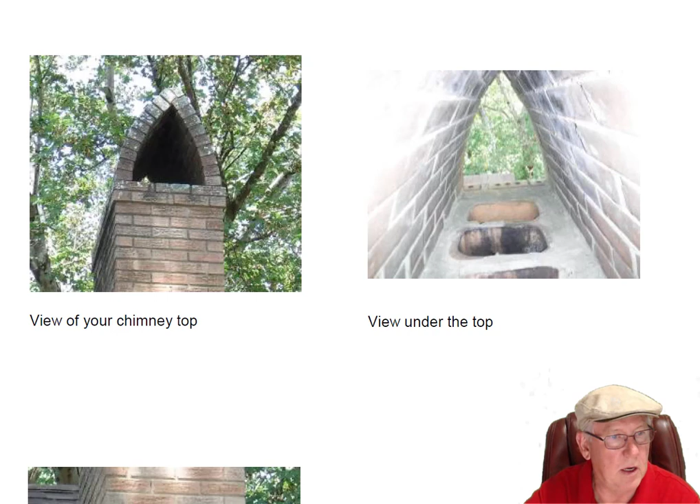Why a mason chooses to use two flues instead of one, it's a mystery to me. I've been doing this for a long time. We would have never done that. We used to build a lot of chimneys in the 80s and early 90s. But anyway, let's see. Flashing looks good. Looking at the flashing here, looks great.

Upstairs fireplace never been used, right? When I came, there was a mountain of trash, leaves and debris behind the damper. We took that out, got rid of all that so we could get an inspection in there. Let's take a look at that flue system. So the upstairs flue, it's straight up. The one downstairs makes the bend around the leg of the fireplace and then goes up like that. So there's more turns to that one.

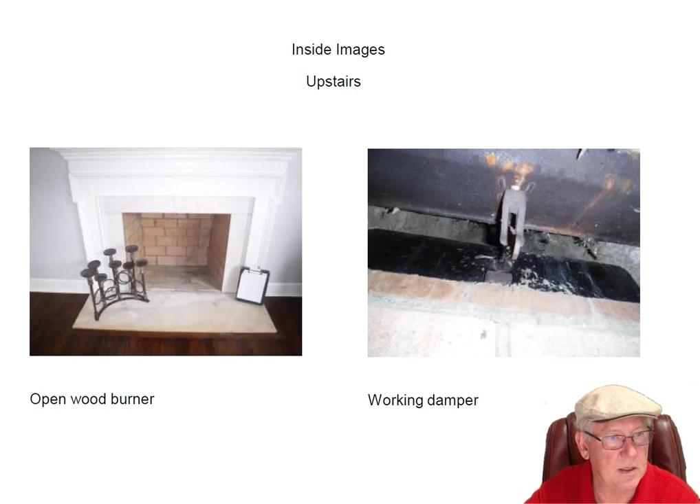But this one, we can see all the way up. As a matter of fact, we ran the camera all the way up. This is actually the bottom side of this chimney cap right here. So we're just looking straight up the flue here. Missing mortar at the flue joints, and this one.

Well, we scan both vertically and horizontally, and that's where you get this shot. And this is done with a different setup. This is called a chim scan. These are horizontal images. Anyway, you could see there was never any cement or mortar between these flue sections. And there's a flue joint like this every 2 feet.

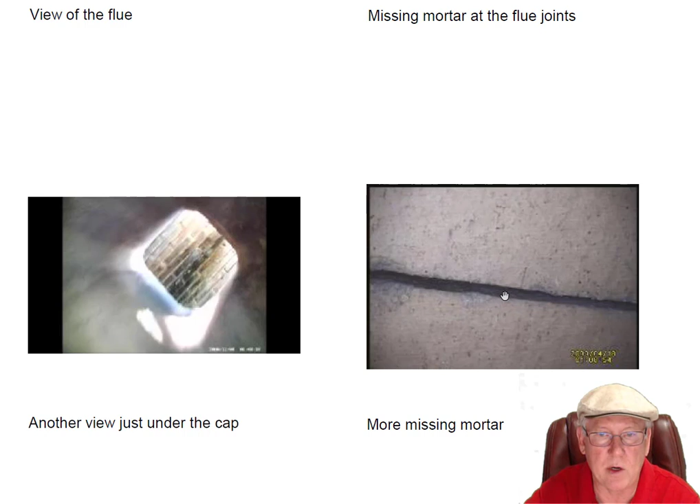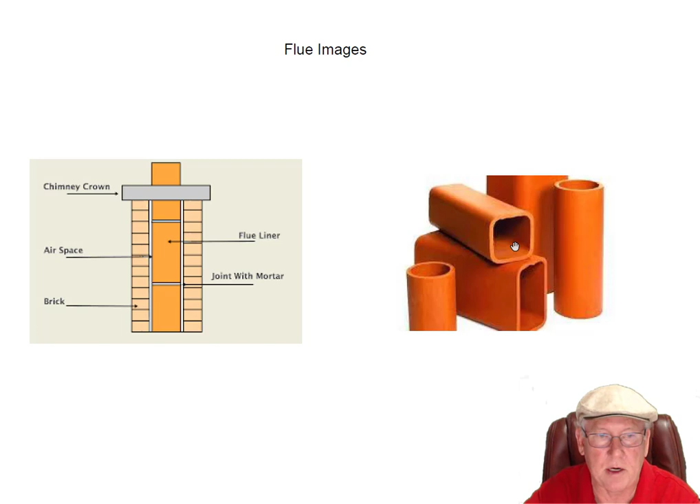Let's see if I put some illustrations in here to kind of help you a little bit. This is basically how a chimney is built. These are in 2-foot lengths, right? And these are the flue joints. And this is what flue pipes look like. Yours is 13 by 13 here. So anyway, that gives you somewhat of an idea how that looks. All right, let's go back.

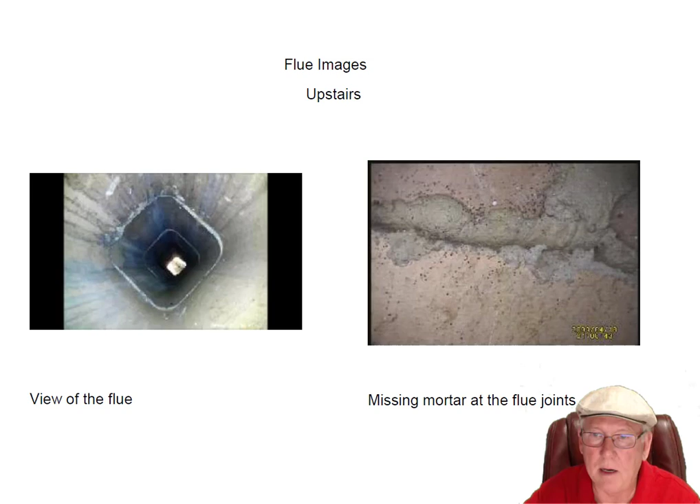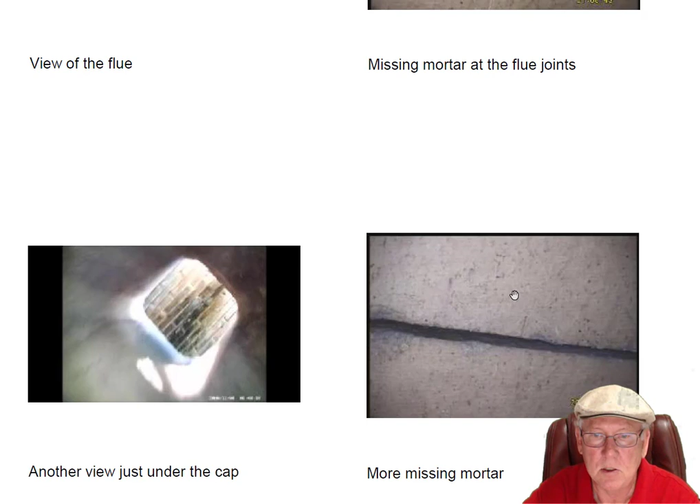Okay, so basically, there's no mortar here, never has been. They've never used the upstairs fireplace. Who knows if there would have ever been a problem. It's shocking to some people that the building inspector doesn't pick up on that, but they don't look at the chimneys very closely. I can tell you that because I look at 5, 6, 7 every day. That's how many inspections I do a day, and I would say that a lot of them are out of spec by quite a bit. The chimneys are too short, they're too this, they're too that.

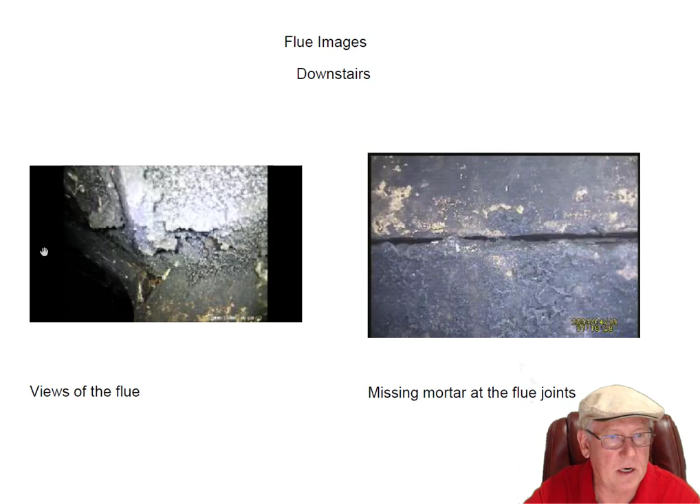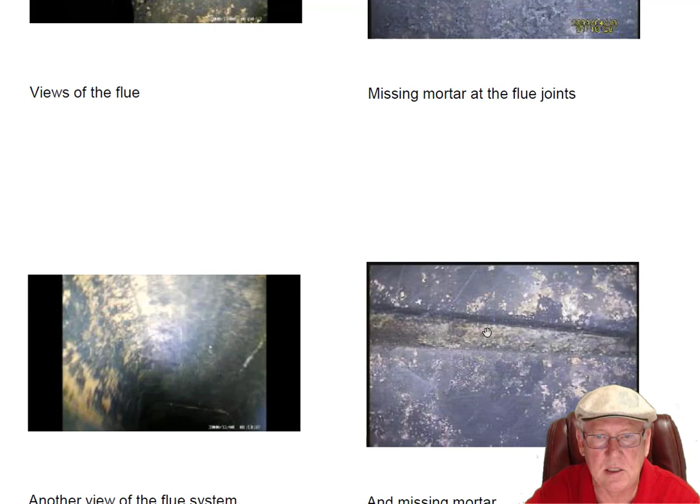Downstairs fireplace flue system, hard to get a good vertical visual of it, but we did the best we could in here. But the horizontal visuals, you could see these pics, they're showing that there's mortar missing in the flue joints. This one, it's hard to tell if there was ever any mortar in there. It looks like there might have been at one time or another.

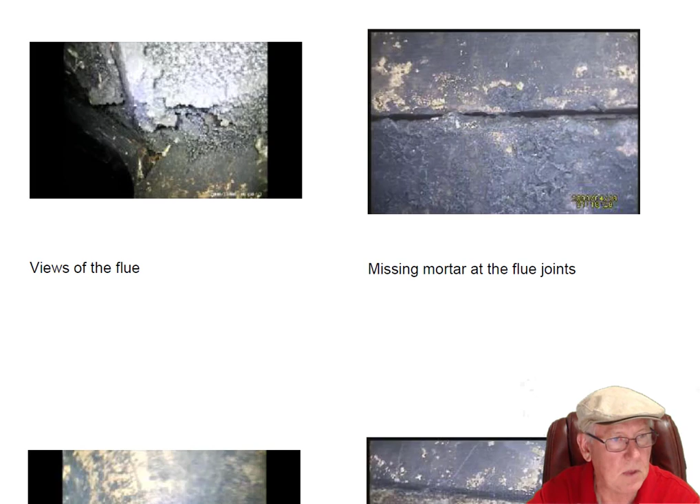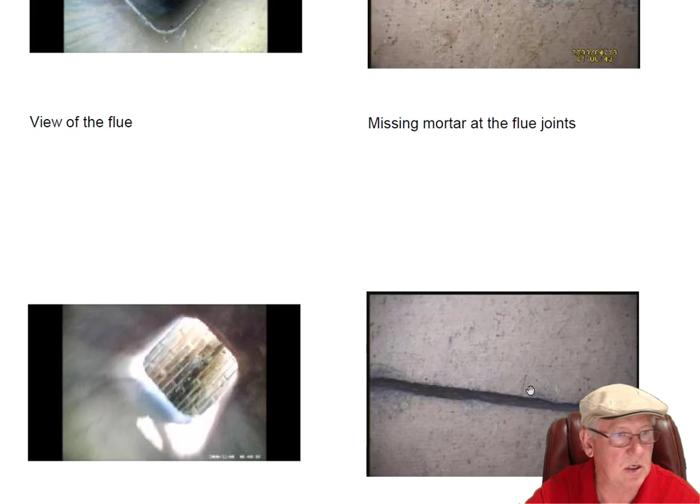If we go back to this one here, this fireplace has never been used. There's no reason in the world why there's no mortar in these flue joints, right? So it just shows you that there never was. It didn't burn out or anything like that. It didn't wear out because nobody's ever used that fireplace.

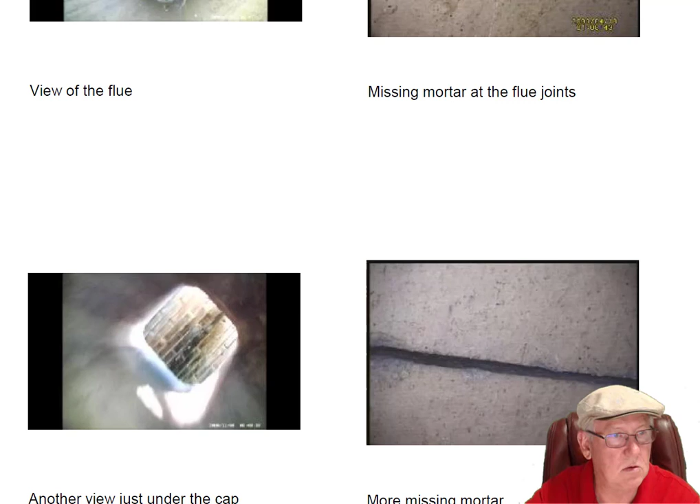All right, let's go downstairs and take a look at this fireplace down here. Beautiful fireplace, beautiful stone. It's got 3 vents. Center vent pulls air in. It runs it through the pipes on the grate here. Heats it up when you're having a wood fire. Gas fireplaces are pretty ineffective in this type of scenario. Heated up and blown out through both sides.

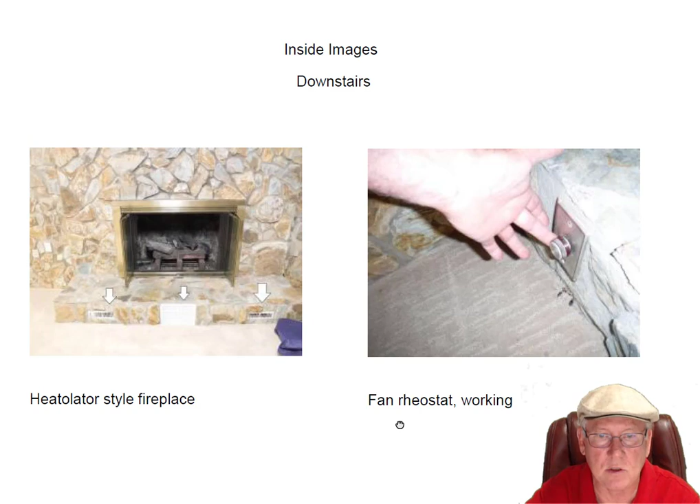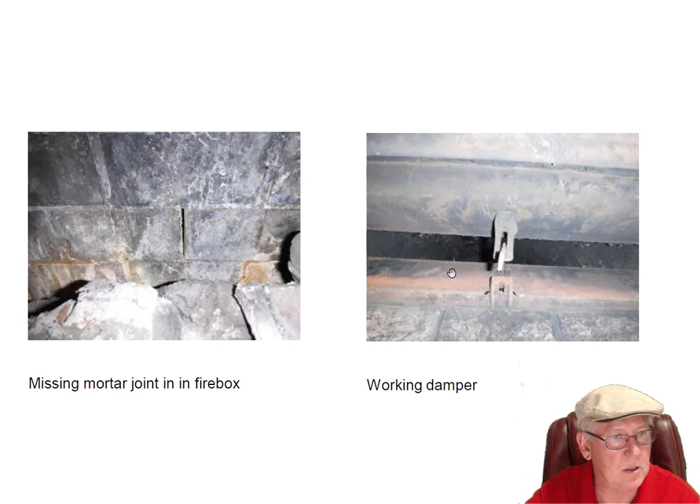On the left side of the hearth extension, right about where my hand is there, there's a rheostat for operating the fan, which works great, by the way. Missing a little mortar in the firebox area. This damper was a similar situation, a lot of debris behind there. We got rid of the trash that was behind there as well, so we could get a good scan on that.

Vent-free gas logs will be your best choice. That's my opinion and recommendation. Vent-free gas logs, just to refresh your memory, are complete combustion. In other words, no carbon monoxide, no carbon soot. Ideal for a leaky chimney because you're not literally even using the chimney. So very safe. Just like a gas range in a kitchen, that's also a vent-free appliance, complete combustion. So if you've ever lived in a house that had a gas stove, it's the same setup.